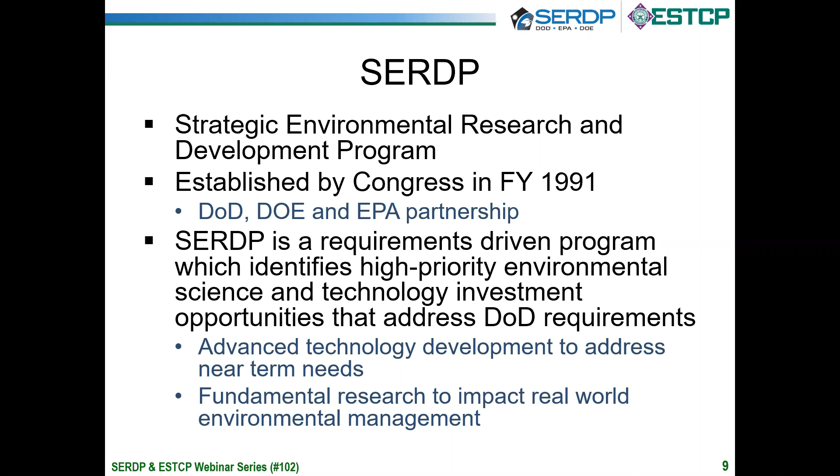ESTCP is the Environmental Security Technology Certification Program. In this program, we demonstrate innovative environmental and energy technologies. These investments capitalize on past investments performed under SERDP or other research programs and are designed to transition technologies out of the laboratory and into the field. Especially important in all ESTCP demonstrations is the ultimate transition to implementation and regulatory acceptance.

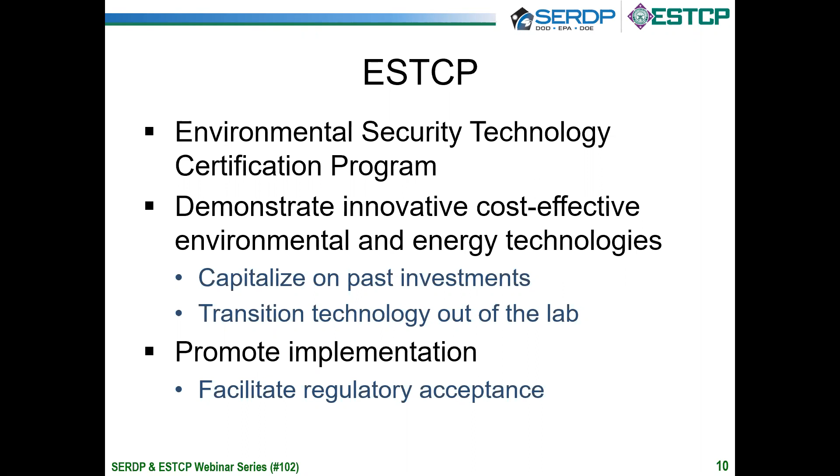SERDP and ESTCP are complementary programs, with much of SERDP's R&D occurring at the lab and pilot scale with occasional field efforts, while ESTCP demonstrations are primarily at the pilot and field scale, although occasionally supporting laboratory efforts are conducted. There are 4 program areas in SERDP and 5 in ESTCP. Installation Energy and Water program is ESTCP only, while the other 4, Environmental Restoration, Munitions Response, Resource Conservation and Resiliency, and Weapon Systems and Platforms, are both SERDP and ESTCP programs managed jointly by a designated program manager.

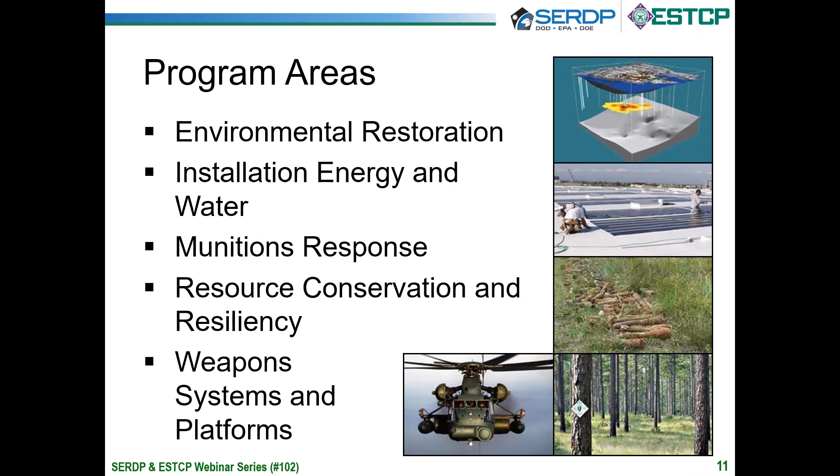Today's webinar presents research and demonstration efforts that were conducted under the Weapon Systems and Platforms program area. This program area has essentially 5 focused areas, which include surface engineering and structural materials, energetic materials and munitions, noise and emissions, waste reduction and treatment in DoD operations, and lead-free electronics.

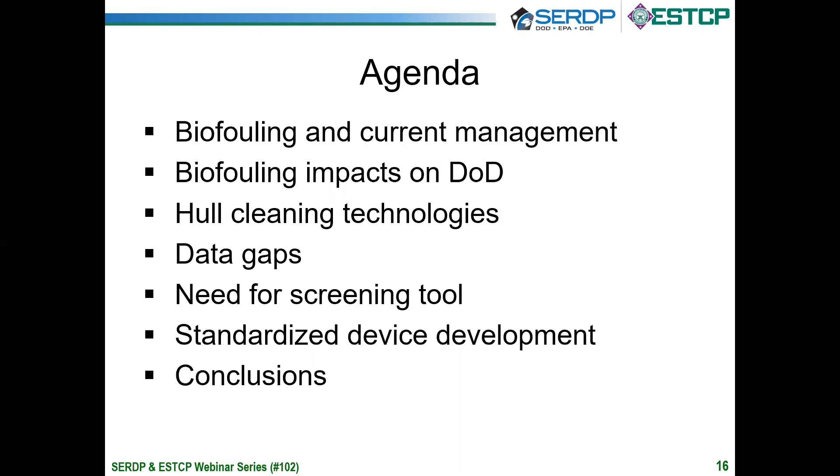I'll finish with some conclusions and look forward to taking some questions. What is biofouling, how do we manage it, and why do we care about it?

Biofouling is the attachment and growth of organisms on immersed and man-made objects. The Department of Defense uses biocide-containing anti-fouling paint systems to control biofouling on the underwater hulls of their vessels. The primary coating system in use is called a copper ablative underwater hull coating system, or anti-fouling paint. These paints are designed to release the biocide cuprous oxide at an effective rate or dose over time, and to prevent the settlement and growth of these marine biofouling organisms.

The coatings are fairly effective, although they're somewhat of an older technology, but eventually, especially on DoD vessels that don't have a very high activity profile, they are overcome by biofouling and some growth will occur. It only takes a little bit of growth of biology to create a roughness that has a negative and measurable impact on ship performance, especially hydrodynamic drag, which impacts speed, fuel efficiency, and these sorts of things. So we mitigate this fouling through the use of in-water cleaning.

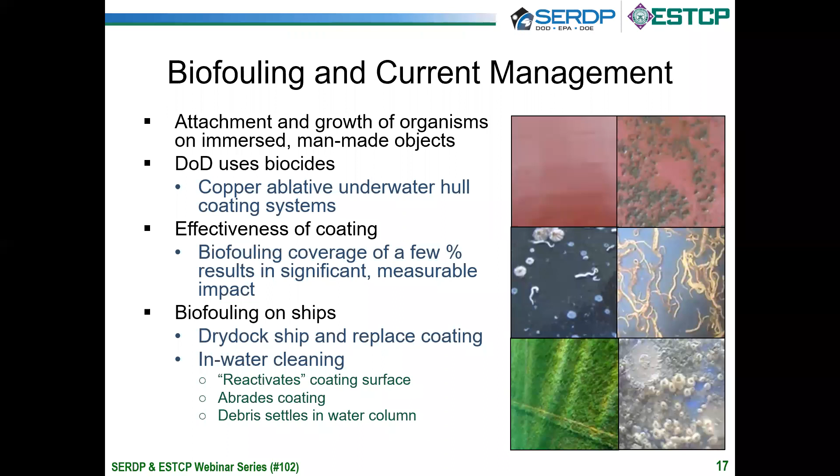Biofouling not only has this negative effect on fuel efficiency, but it also can negatively impact speed, range, and maneuverability of vessels. When we're in the process of mitigating biofouling that accumulates during these maintenance events, the ship is essentially taken offline and can't be used for its intended purpose. Although those cleanings don't take a long time, they do require the ship to be pierside.

Biofouling also has negative effects on signatures, and if we're using energy and fuel to overcome the roughness and drag associated with biofouling, we're not able to use that same energy for our military intent. There are air and water quality concerns that center on biofouling control that I'll highlight as we go through.

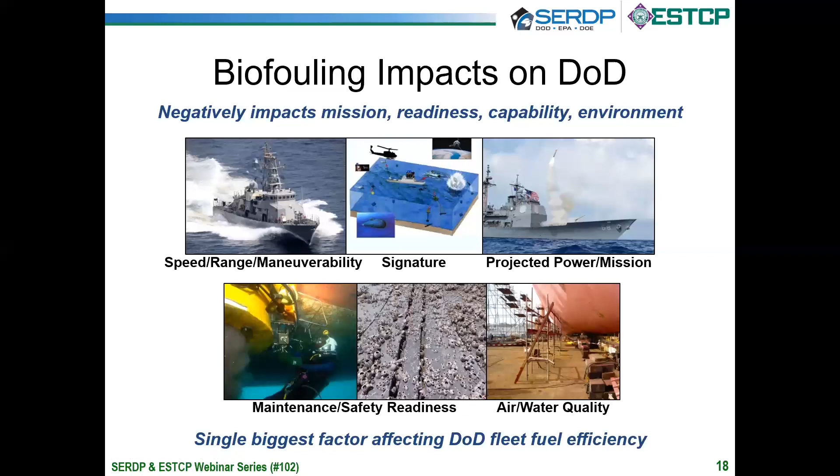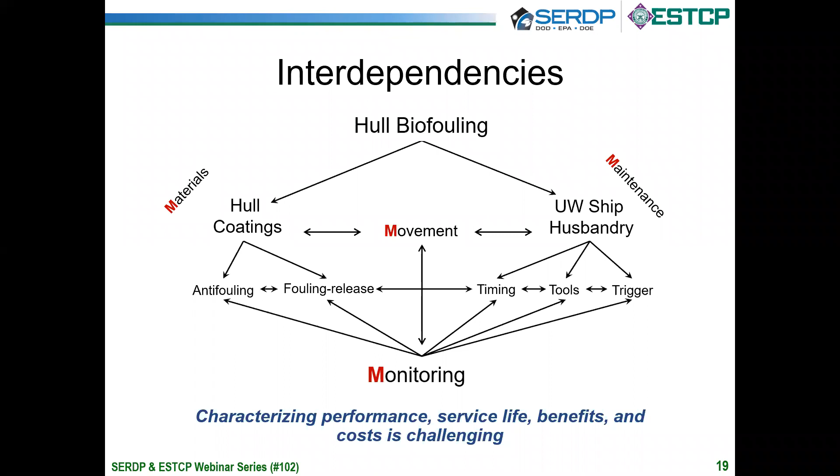There are copper ablative anti-fouling paint technologies that contain the biocide cuprous oxide, but there are also new coatings on the market that contain other biocides, sometimes combined with cuprous oxide, but sometimes without heavy metal biocides. These organic pesticides are of high interest because of the reduction in heavy metal used, but also because they have a shorter environmental half-life, which could be beneficial.

There are also some biocide-free coatings on the marketplace. The primary technology is called fouling release. This is a low surface energy coating that minimizes the ability of biofouling organisms to adhere and stay well adhered to the surface of the coating.

These have been evaluated for DoD use but aren't in wide use. They're not a particularly good fit with our operational profile, as our ships spend consecutive weeks and months alongside or in a harbor at times, so it's not a good match.

There are some hybrid coatings being introduced to the U.S. market that have some fouling release aspects combined with some biocides. So entering the U.S. market today are a high number of advanced coating systems that are of high interest to the Department of Defense.

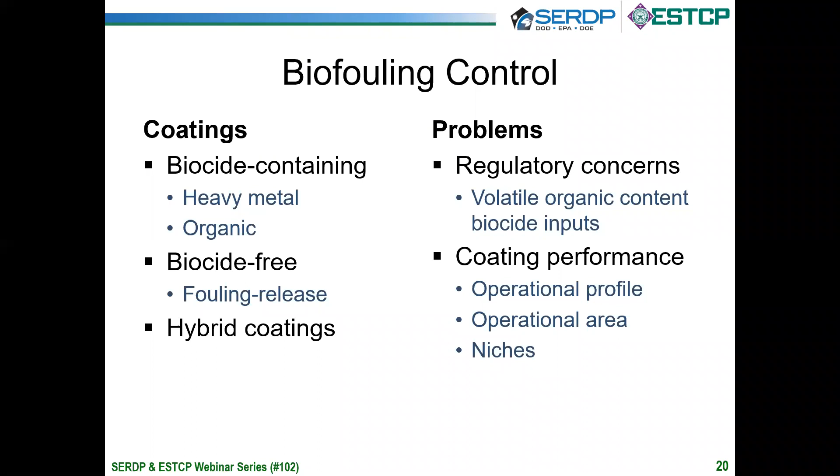Slide 21. So when a hull coating system fails, we execute these cleanings. Now they could be executed in dry dock, but that would be very expensive and time consuming. I would suggest that for DoD vessels, because that's what I'm most familiar with, there would not be enough dry dock space available to execute the cleanings with the frequency that they're needed.

So in-water cleaning is the low-cost solution. It's relatively quick and relatively low cost, and the benefit of it is well documented. The payback period is quite short, especially in the context of fuel efficiency.

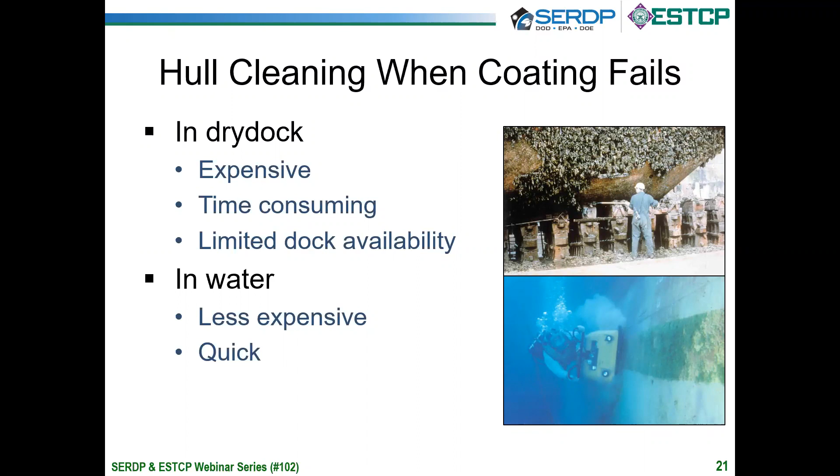Slide 22. The Department of Defense, and in particular the U.S. Navy, have a long history with in-water cleaning. We've been conducting cleanings on different paint technologies since at least the 70s.

We don't want coating failure and biofouling persistence to be the driver that brings ships in for dry docking. So we've underpinned the performance of these coating systems with in-water cleaning, primarily with rotating brush tools, one of which is shown in the lower left picture on this slide. These coatings have enabled our Department of Defense vessels to go longer periods between dry docking, which is a positive and a huge cost saver.

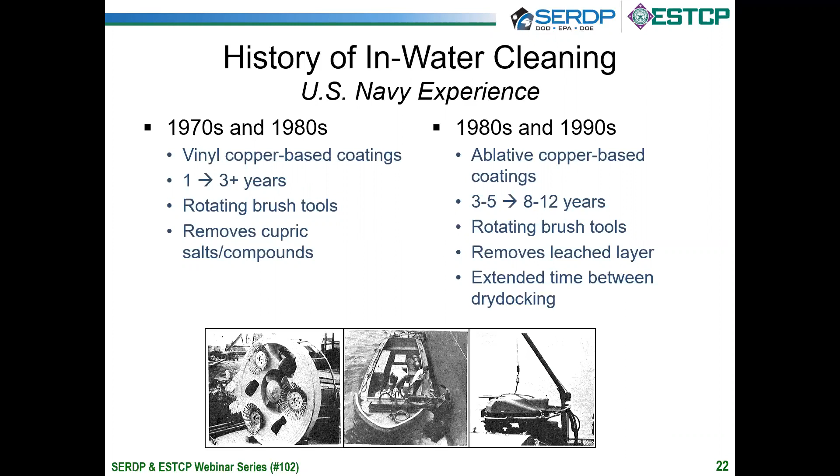Slide 23. The rotating brush tools that we currently use are something that can be applied whenever sufficient biofouling triggers a cleaning. Most U.S. Navy ships, at least, undergo inspections nominally twice a year.

Not at every inspection is there necessarily a cleaning done of the underwater hull paint system. The cleanings are triggered by a combination of a fouling rating, which is an assessment of what type of biofouling is present, and a percent cover of that rating. So the trigger for an anti-fouling hull coating cleaning is a fouling rating of 40, which is small calcareous biofouling, over 20% of the hull. And for a fouling release coating, it's a fouling rating of 50, over 10% of the hull.

As I suggested, we primarily use rotating brush tools for anti-fouling paints, but we've determined that water jet tools are the proper tool to use for fouling release coatings. They're in limited use though, so we don't have particularly mature water jet cleaning technology in our repertoire.

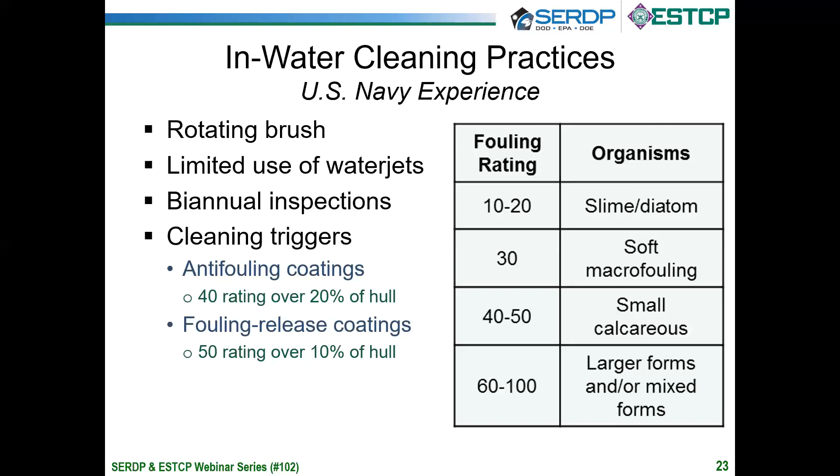Slide 24. The benefits of in-water cleaning I've already described: removing the biofouling as well as restoring coating efficacy. But there are these consequences: the discharge of paint components, the impact on coating integrity, especially paint thickness, and for fouling release coatings and brush tools in particular, a negative impact on surface properties.

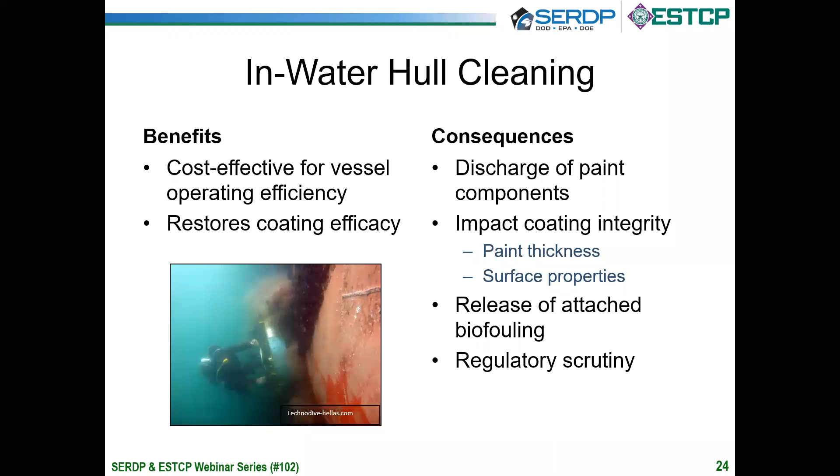Slide 25. So we need to find the right solution. We need better metrics to understand the impact of cleaning tools on hull coatings and their environmental inputs, because environmental regulations represent a constraint that affects this 4M's interdependent variables image that I've already shown.

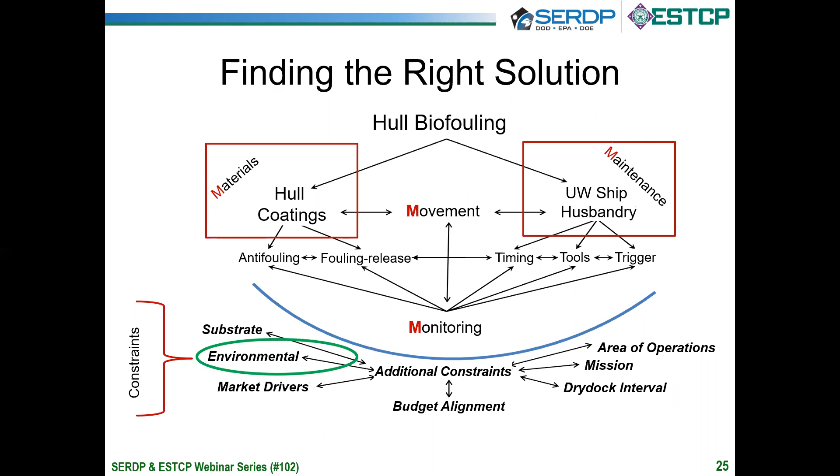Slide 26. So what is it that we don't well understand? Well, our lack of understanding in terms of in-water cleaning is primarily linked to how the cleaning tools affect coatings that we haven't been using for a long time.

These coatings that I mentioned are emerging into the U.S. market and are of high interest to the DoD. So we need to understand the impact on coating thickness change, any kind of damage to the coating, and potentially subsequent efficacy of the coating following a cleaning.

But we also don't have a very good understanding of the actual environmental inputs from the coating cleaning, including both chemical and biological components. We also understand that this relationship is going to be affected by the combination of cleaning tool, coating type, and cleaning strategy.

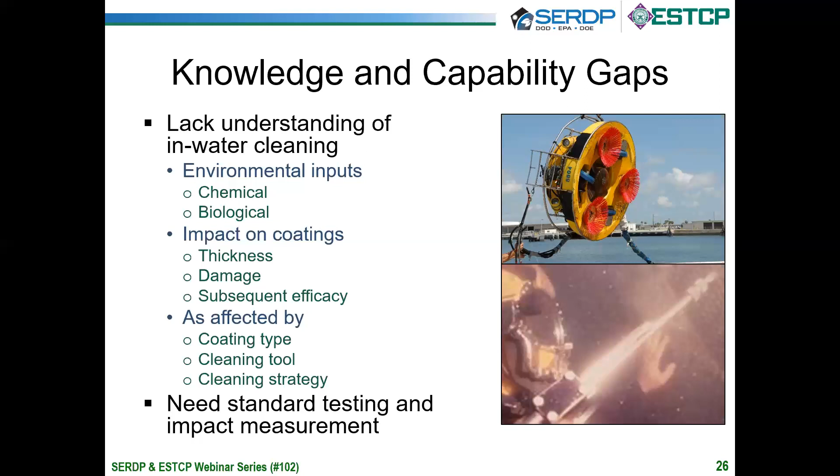So we've identified a need for a standard test to quantify this relationship, because we've explored other tools and techniques that don't seem to be a good fit, which I'm going to describe. Slide 27.

One option that we considered for understanding the impact of cleaning on coatings is this Elcometer washability tester, which is commercially available, but primarily used to evaluate the impact of standard cleaning brushes or other materials such as sponges on architectural coatings. So it's not a particularly relevant tool for marine coatings that are used on ships.

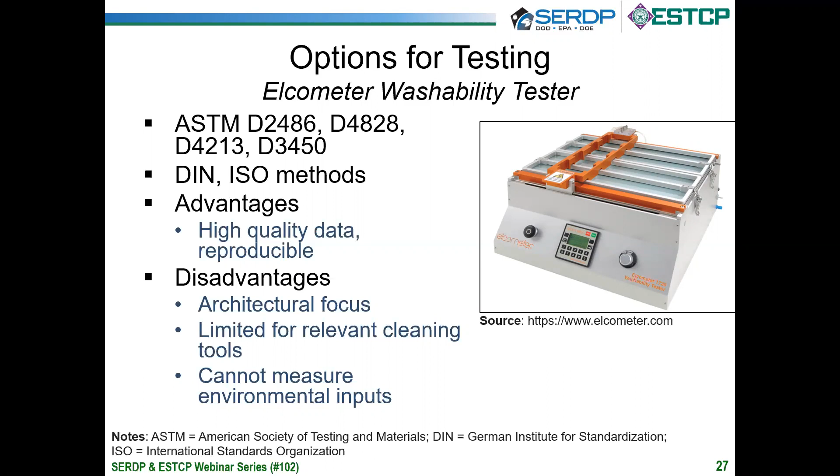The advantage of the tool is that we have high quality, reproducible data, but it's of limited relevance for us, and it would be very difficult to measure the associated environmental inputs that are of high interest to us. Slide 28.

Something we have tried, and have decent experience with, for the legacy copper ablative paints we've been using for a few decades now, is evaluating the thickness change before and after cleaning directly on a ship hull. The advantage here is that we're applying the full-scale tool to in-service coating, but the disadvantage is that it's very difficult to resolve small changes in paint thickness, and we have a very limited ability to assess the environmental input from the coating in terms of particulate and biocides.

For the new coatings that are of high interest to us and that we're actively evaluating, it would be high risk to apply this technique to coatings where we don't have any familiarity with how they might respond to cleaning tools, because if the impact is quite high, then we basically have a bare spot on our hull, which would not be desirable. Slide 29.

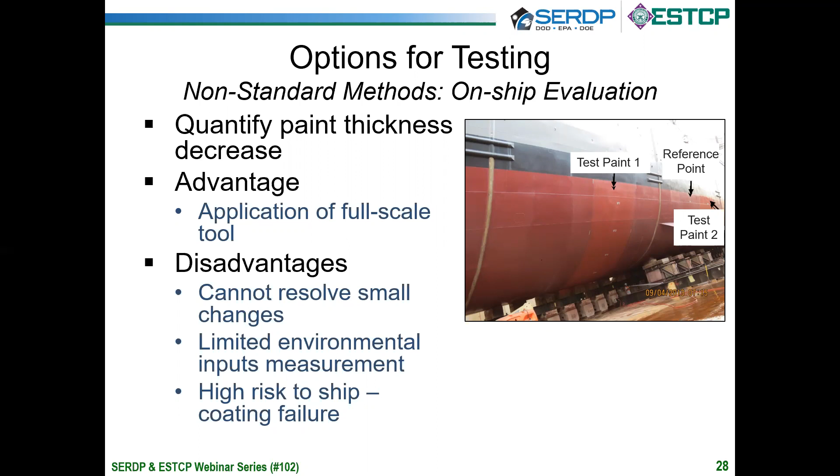Another option for testing that we've used and tried is what we refer to as a raceway test. In the upper right, you can see there's essentially a panel about the size of the wall of your average meeting room.

In that raceway, there's a removable panel to which we can attach test paints on test panels. We can run the full-scale tool across those test panels, and remove them for up-close analysis. The advantages are that we can apply the full-scale tool, and the data are very high quality because we can control exactly how the paints are applied to the panels, and there's no risk to the ship.

The disadvantage is that it's quite high cost. A lot of infrastructure is needed, and there are only a limited number of places where you can do this kind of testing. There's also a limited ability to measure any kind of environmental inputs.

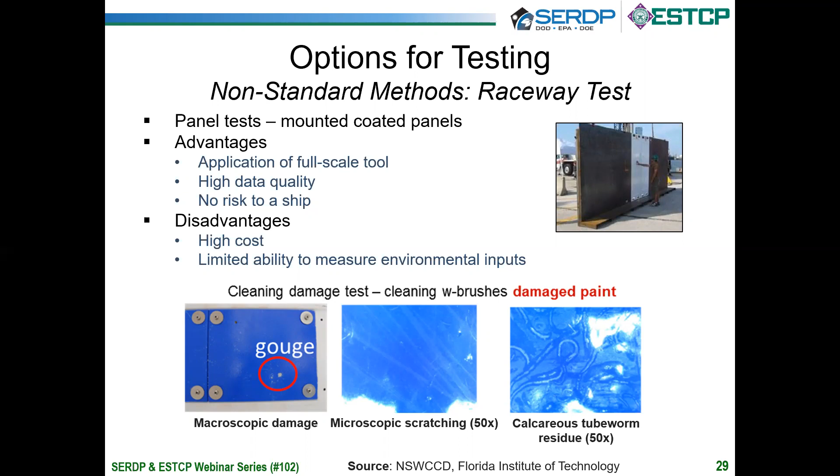Slide 30. This just provides a few more photos of the raceway test, and you can see on image number 3, 10-inch by 12-inch panels that have been bolted to the removable frame.

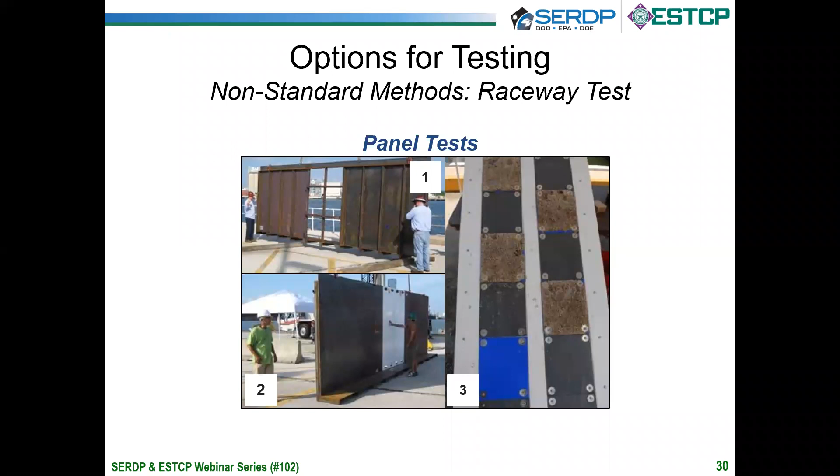Slide 31. So this brings us to where we are today— oh, I'm sorry, take that back. I forgot there's one other option for testing that we have evaluated, and that is a diver handheld tool. We'll go to slide 32, and then we'll come back to 31.

This is a schematic of the handheld tool. The height of the sample chamber, just for scale, is about 6 or 8 inches. So this is essentially creating a trapped volume of water. It's a tool that can be applied by the diver directly to the hull of a ship.

We have a cleaning material at the base of the sample chamber, and then we have this crankshaft which allows us to rotate that cleaning head. You have a trapped volume of water with the double-edged gasket, so you can sample the amount of biocide or biology that is removed. Slide 31.

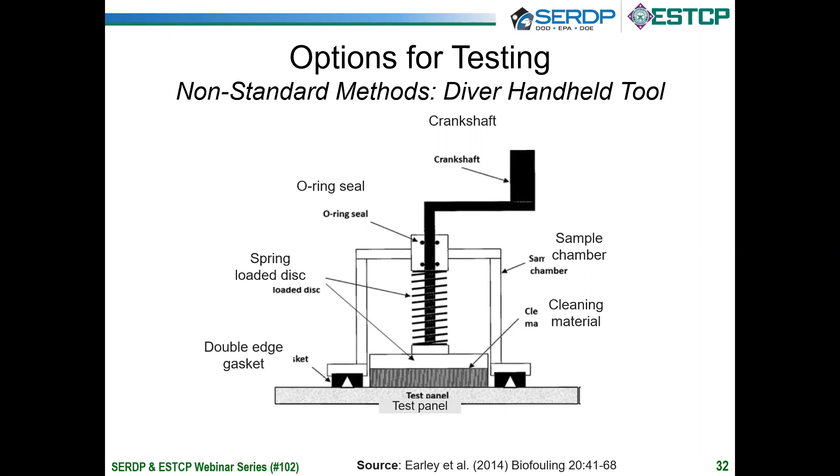The advantage to this type of tool is that you can quantify the biocide inputs, which is important. You could also quantify paint thickness change, but you're not getting the type of forces imparted on the paint that you would from a full-scale rotating brush tool. So you're not using the full-scale tools.

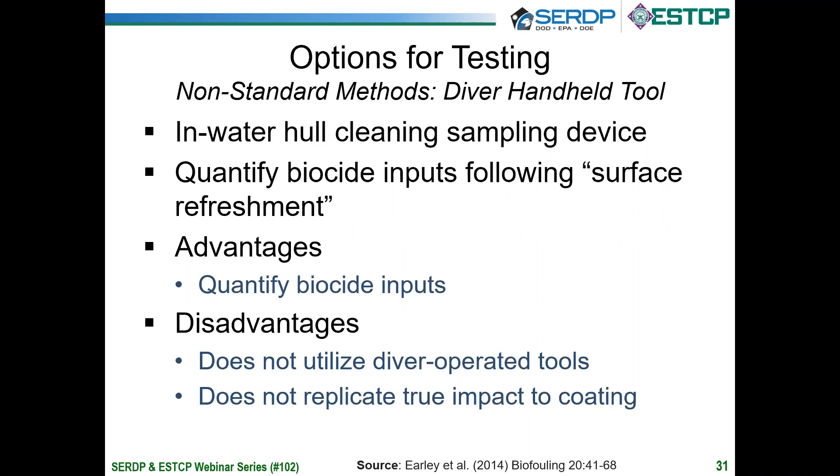Slide 33. So this brings us to the standardized device and method that is desired in order to fill these knowledge and capability gaps. We need to address the weaknesses of these other methods, and we want to be able to match the operational characteristics of the tools that are used in the field while also being able to sample the water quality for the biocides that are released.

So as part of our ESTCP project, we detailed a large number of design requirements, and we designed the tools to match the operational characteristics of the full-scale tools and be able to quantify the biocide released. Slide 34.

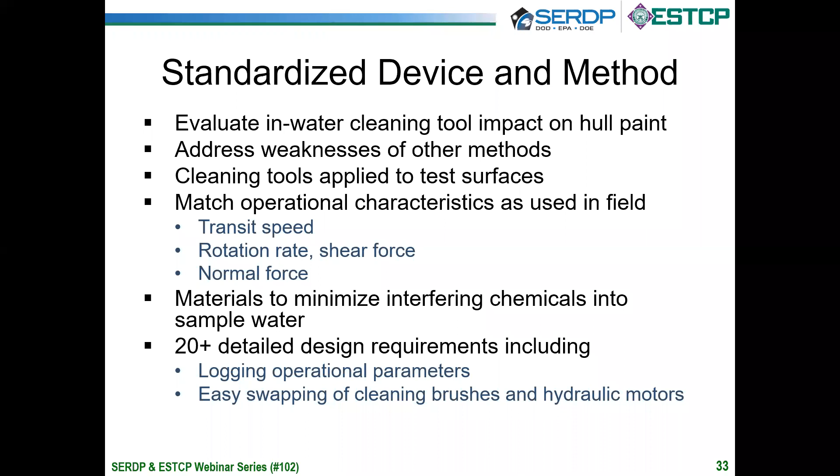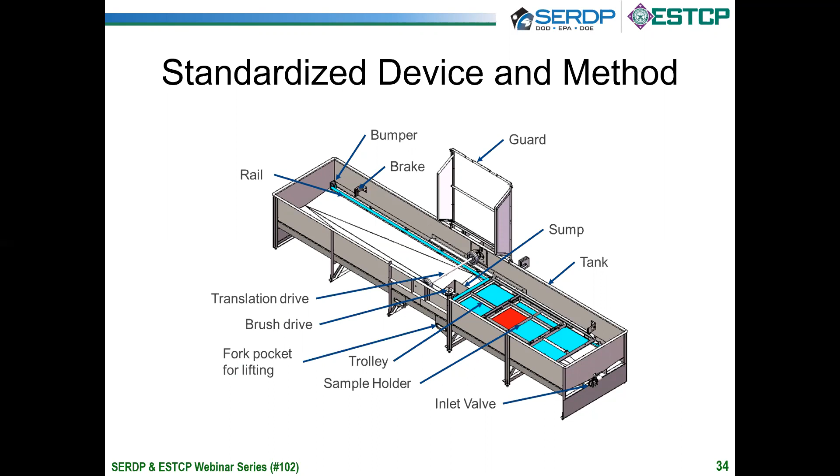Next, slide 35. This is a close-up of the trolley and the sample holder. We made it so that the sample could be easily replaced because we want to evaluate the impact of these cleaning tools on several coatings, and of course, we would like replication.

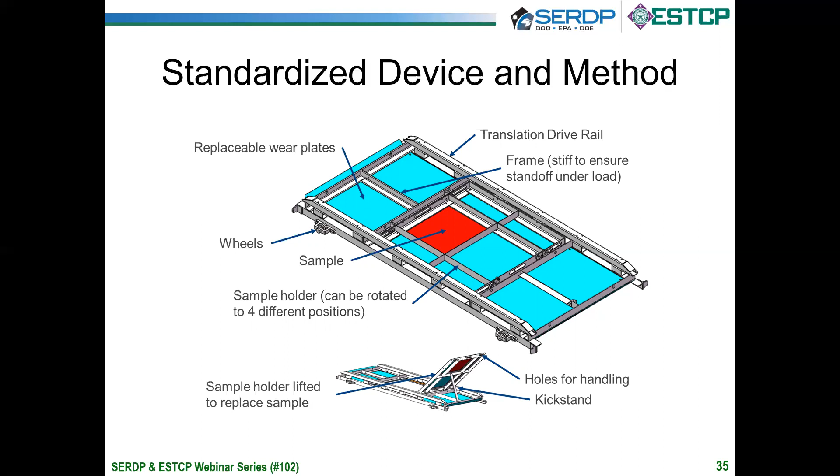We will be quantifying the changes in paint thickness or any other impact to surface properties, and we will be sampling the water quality for dissolved metals, particulate matter, and we're especially focusing on quantifying the amount of copper and zinc released.

Right now, this is a screening test to compare the legacy products to emerging coating technologies, and there won't be any analysis of biological inputs, although that would be possible to do in the future.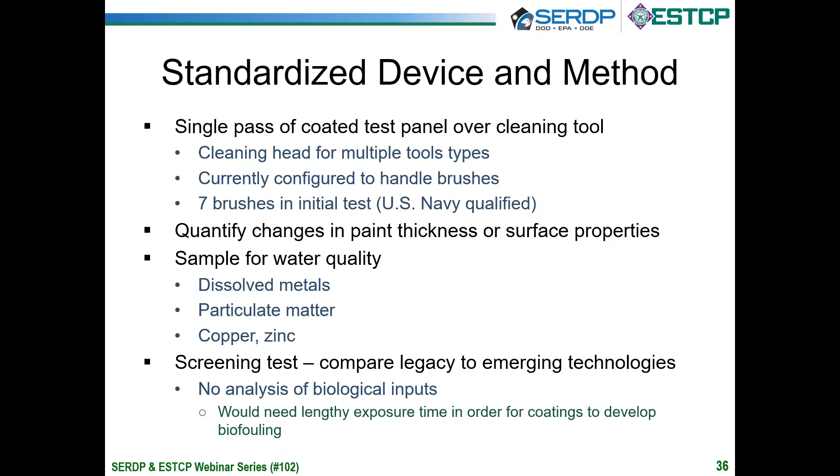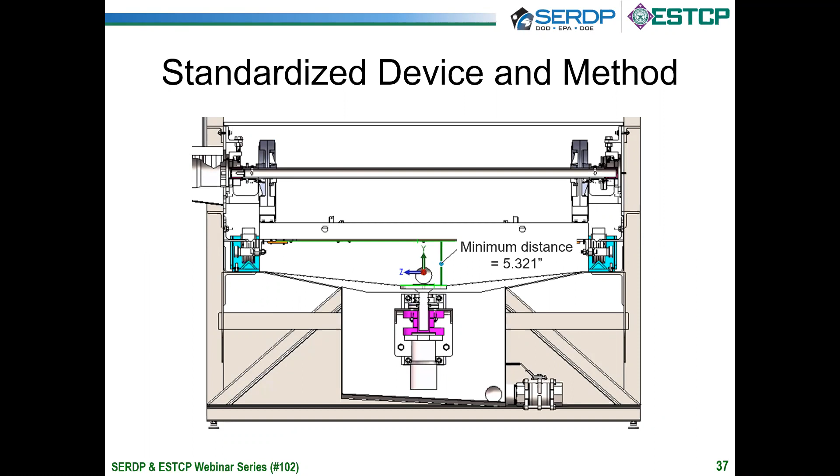Slide 37. This is another view, a cross-section now of the tank, showing the motor that's going to rotate the brush in the sump, and then the trolley is shown overhead. The brush is not in place in this view.

Slide 38. This is now a side cross-sectional view with the motor being represented by the orange rectangle and the brush being represented by the green triangle, essentially. And then you can see that we're basically showing here how the trolley translates the sample over the brush.

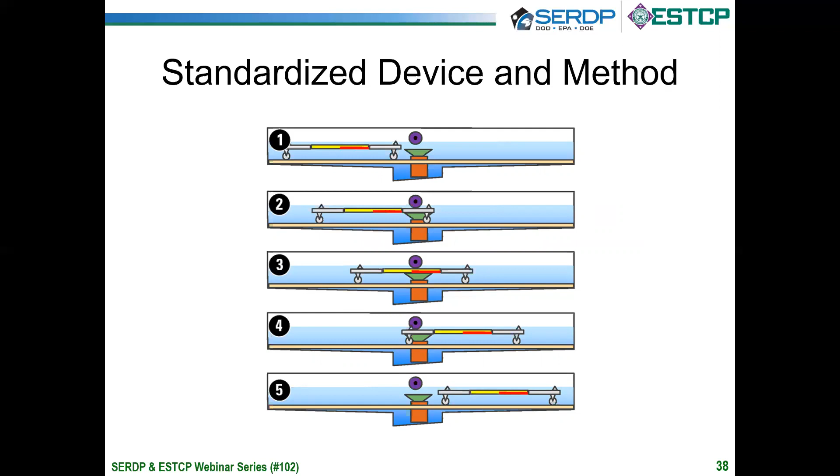Slide 39. So in conclusion, the underwater hull coatings that we use essentially require underpinning by in-water cleaning. This is an effective and efficient combination of technologies until a better paint system can be demonstrated, validated, and transitioned. But there are some important concerns about cleaning, and there's a poor understanding of the impact of cleaning tools on coatings with which we don't have much familiarity. So we need an improved understanding in order to aid regulators and technology developers, as well as end users and stakeholders. So this standardized tool and method is going to help inform the problem.

The tool has potential uses beyond the current scope of the project, such as brush development, alternative cleaning tool evaluations, such as water jets. We could evaluate cleaning efficacy, that is the efficacy of biofouling removal. We could even evaluate biofouling survival or the impact on biological oxygen demand from the removal of large quantities of biofouling.

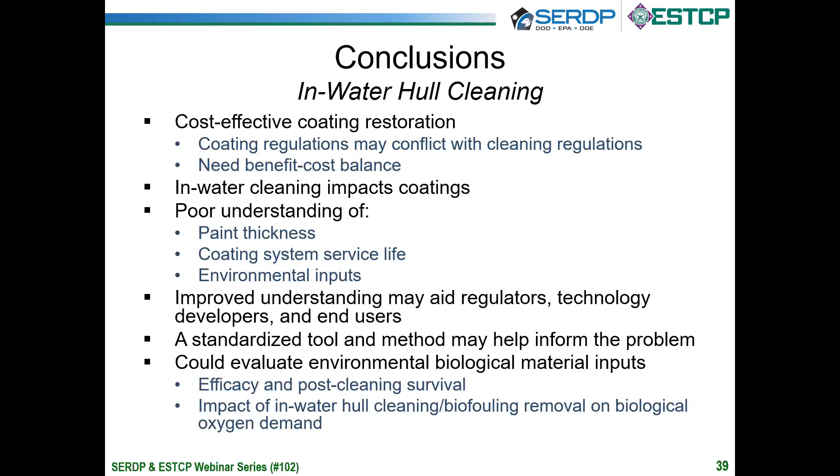Slide 40. The benefit to the Department of Defense is to establish a standardized method and protocol to close the critical knowledge and capability gaps, especially in the context of reducing the risk associated with new coating transition and helping our ability to predict coating system service life, especially tied to the impact on paint thickness change over time. And then the assessment, to enable more comprehensive assessment of the use of in-water cleaning as a biofouling mitigation strategy. And it underpins the key environmental quality concerns that I identified, which are primarily rooted in air and water quality.

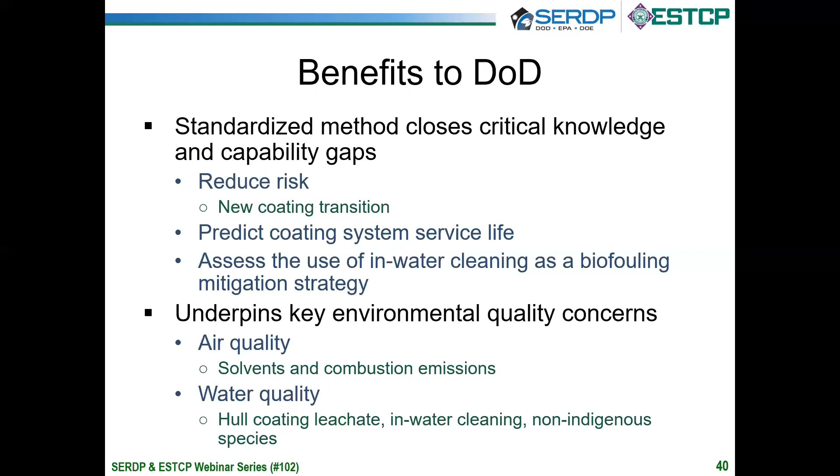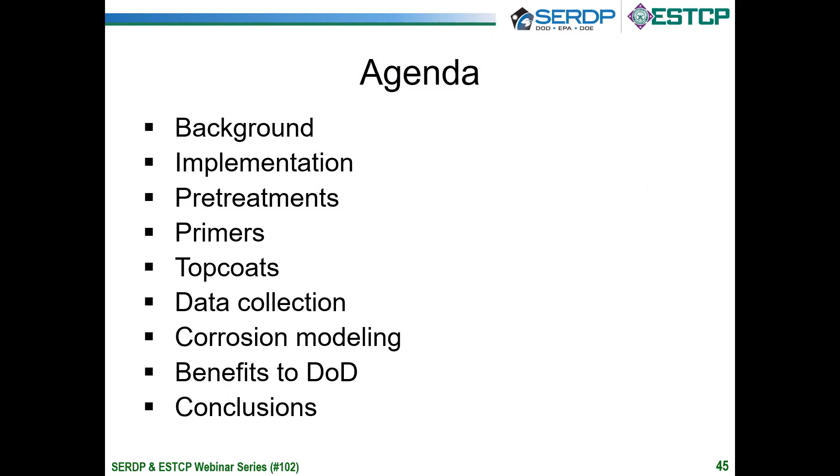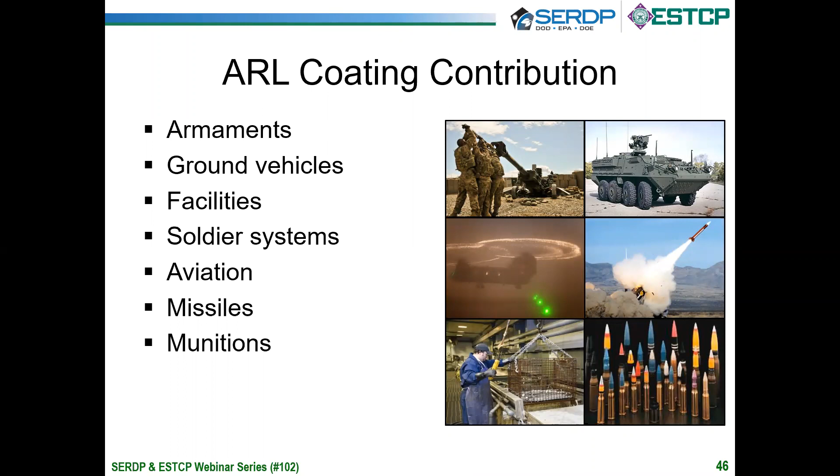Very often we are asked where these coatings are used and how they're applied. We wanted to give you a sense of the various areas. Not only do we apply these coatings on ground vehicles, but also aviation, munitions, and a tremendous amount of support equipment, to give you a gist of where these coatings are applied and used throughout the DoD.

One of the key aspects that enables us to transition technology is not only our authority, but our leadership within this whole arena of CARC, or chemical agent resistant coatings. We have an Army regulation, AR 750-1, that says any piece of tactical equipment going into the battlefield will have our CARC coating or CARC stack up. Along with that, as the commodity manager we are responsible for the various specifications, revising and creating new requirements that enable us to forward the technologies.

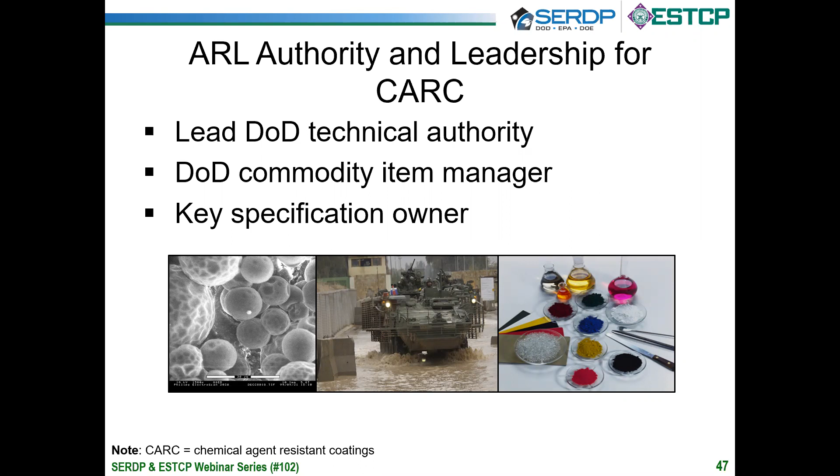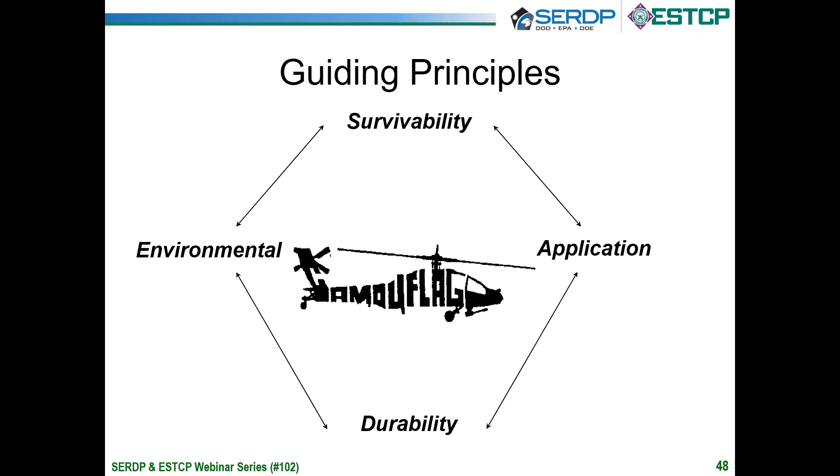It's a very excellent way to use as an implementing or transitioning product.

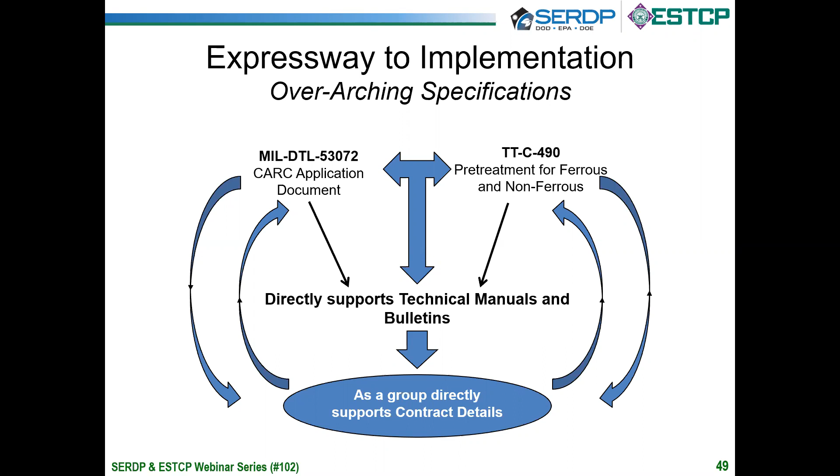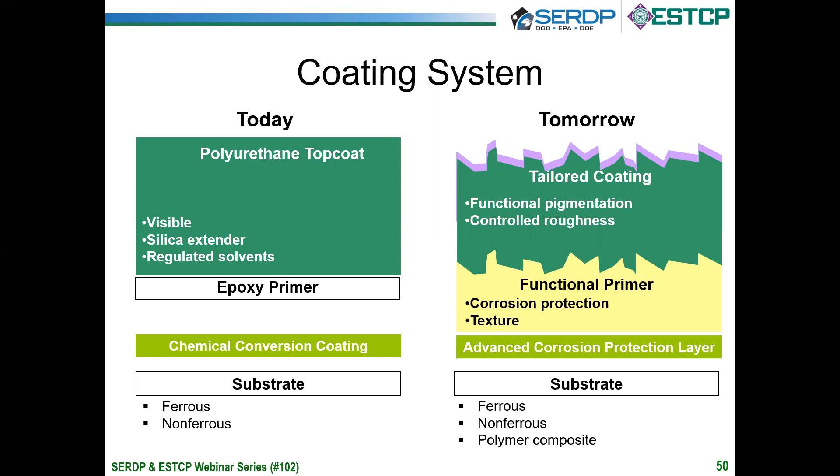Today I'm going to walk you through the pretreatments we use that support or passivate the substrate, then talk about our primer systems, and lastly our top coat. The pictorial here highlights that while we see these as the traditional stack up, the future or next generation of coatings is very multifunctional, and hopefully as we go through this you'll see exactly what we're speaking toward.

With regard to pretreatments, probably and most fundamentally the hardest or most difficult hurdle we've been addressing for some time is the elimination of hexavalent chrome. What was capturing that was spec 15328, often referred to as wash primer, which involved a tremendous amount of solvent and hexavalent chromium.

As we explored alternatives, we found many alternative pretreatments that could be sprayed applied like the wash primer, providing equivalent or better corrosion resistivity. Through all these projects, supported by SERDP or other agencies, once we get through the lab work, or simultaneously with lab work, we'll also be executing demonstrations so we can see what these things are doing in the field.

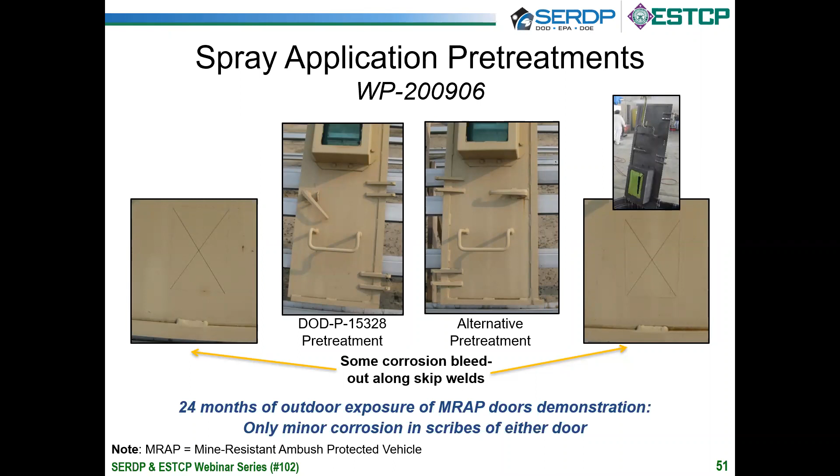Another example: through this wash primer, we were applying it on support type equipment and then exposing them outdoors, such as at Cape Canaveral Air Force Station, again looking for severe environments and information as quickly as we can get it, to discern whether these alternatives would be viable.

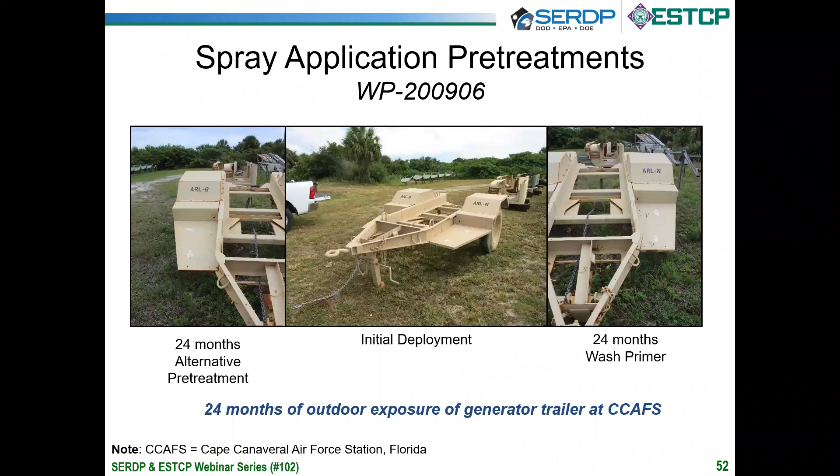Very often, especially for our steel substrates, we're looking at zinc phosphate, and again for the spray application, looking for alternatives to that kind of more conventional pretreatment.

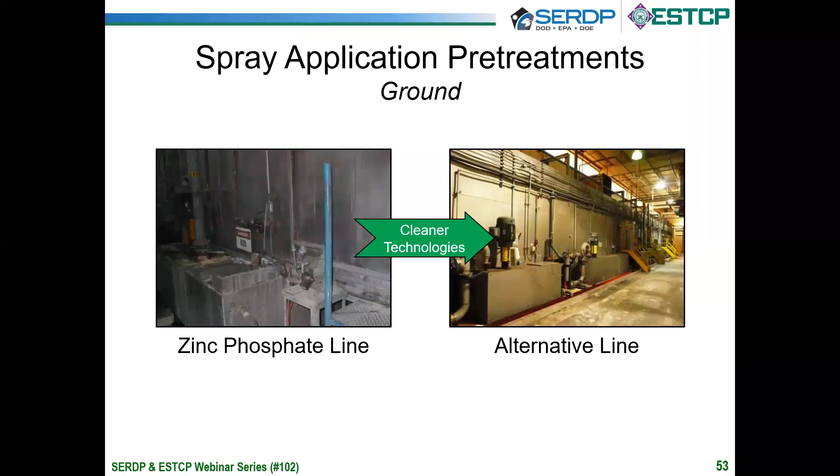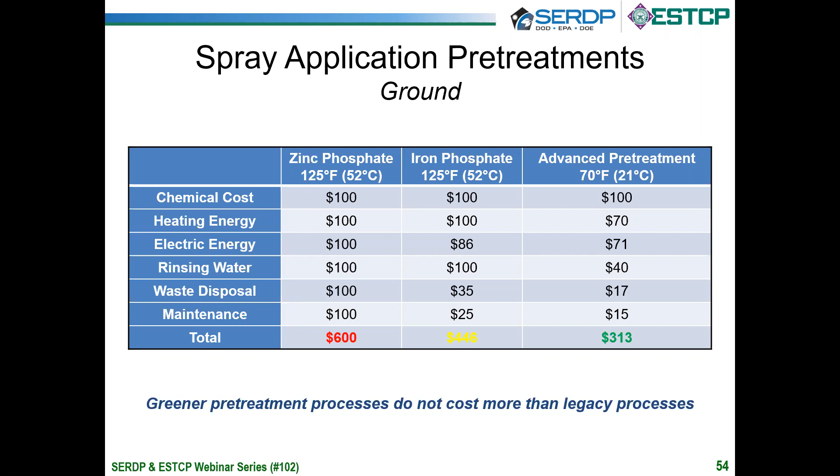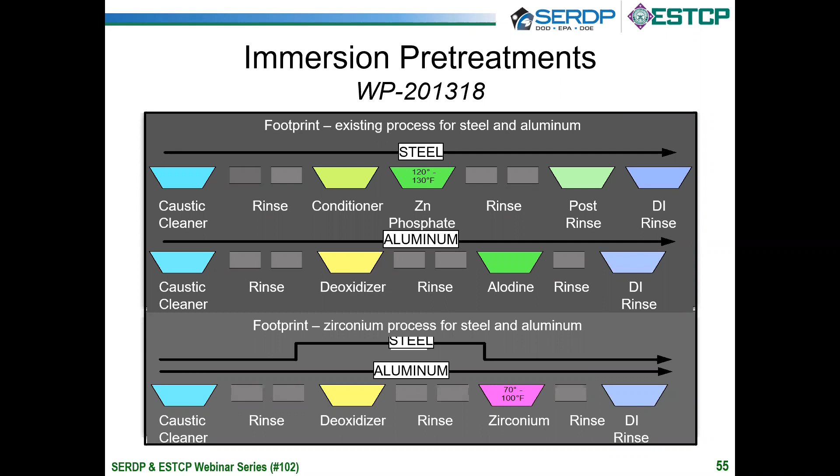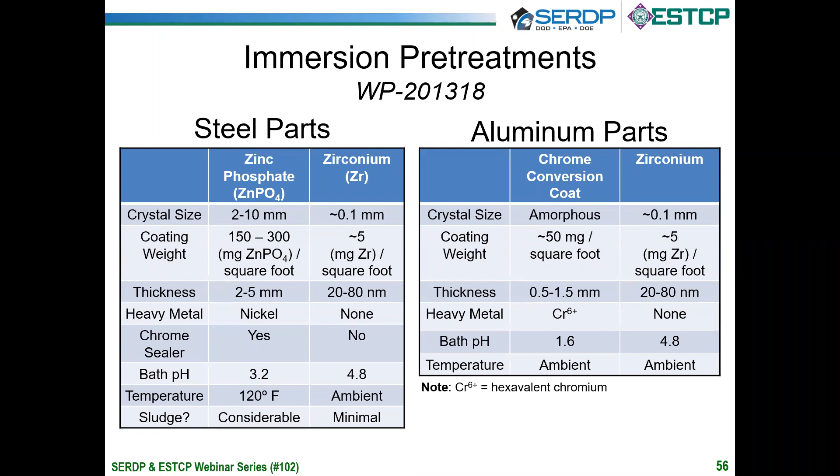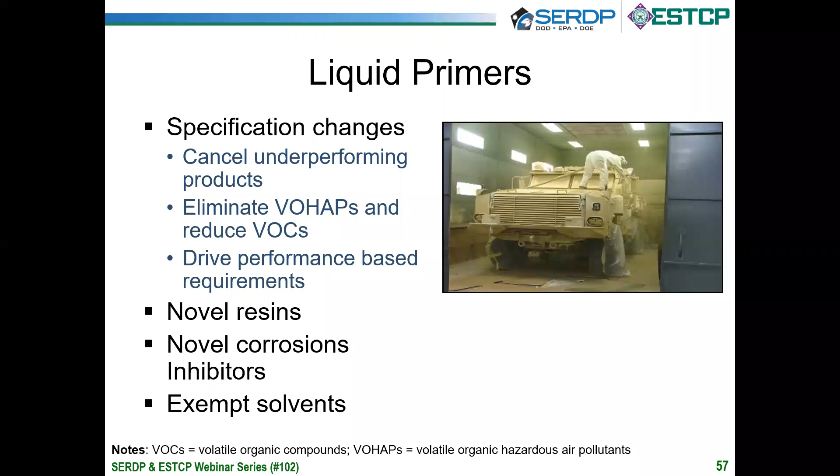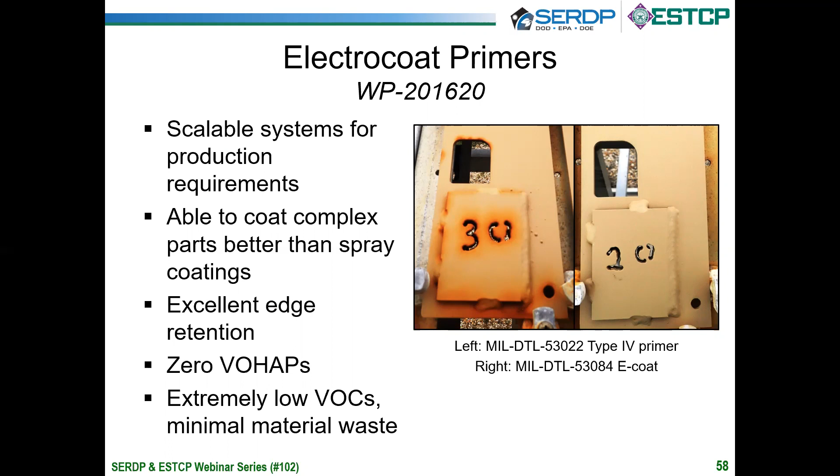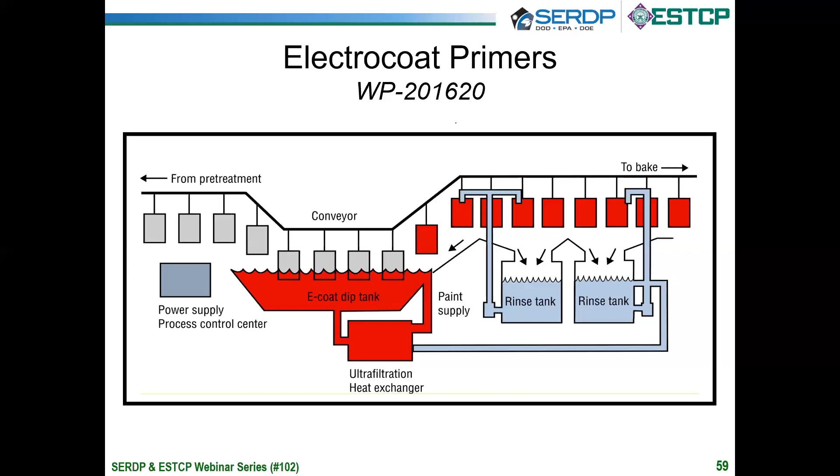Slide 59, please. And to my point, here is just a schematic of the whole process. So we'll be able to take pretreatments that are applied and then use the E-coat as a primer system, and then subsequently bake it, and then have our top coat applied.

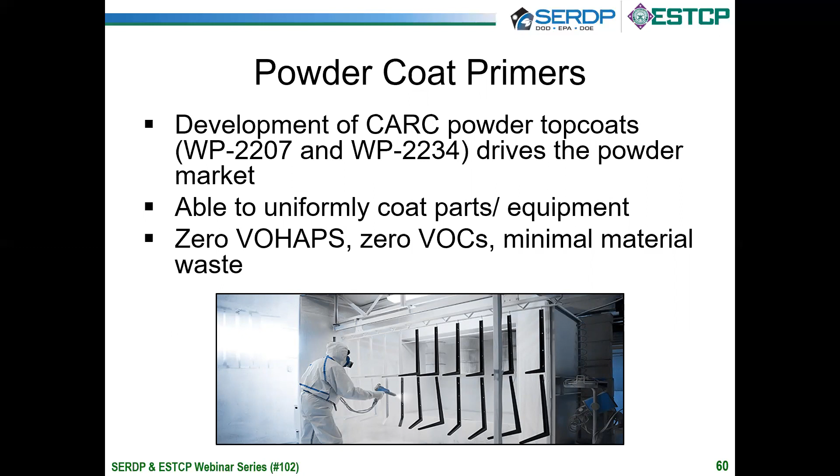While we've been discussing our pre-treatments and primers, what I'd like to shift into now is discussions of our top coats, and recognize that while we did that differentiation, it is and always will be a system. Sometimes I jokingly mention that the top coat goes for the ride, and there is some truth to that, but the reality is the top coat is truly the first line of defense from the exterior elements, and then the pre-treatments and primers are doing their job to passivate the substrate or provide good adhesion.

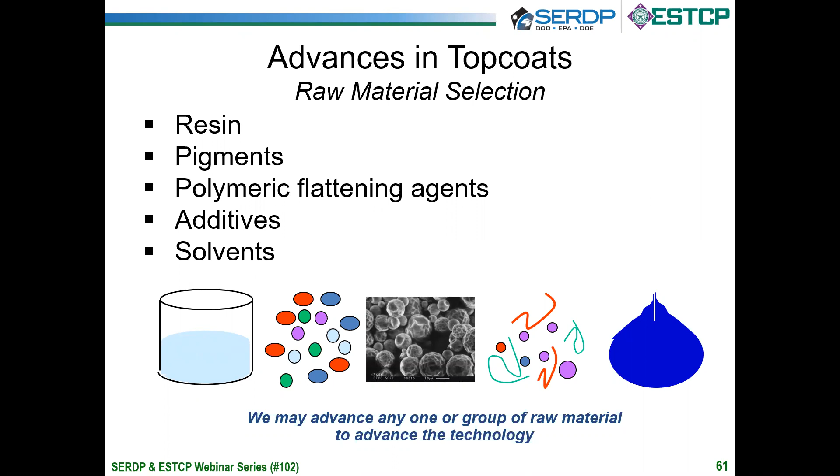So when we begin a project, we often look at particular raw materials within the coating system. And with few exceptions, these are the 5 raw materials typically incorporated in coatings. The exception would be, for instance, powder, which would be solventless. But each one of these is a key aspect to the overall longevity and meeting requirements for top coats. Let's go to the next slide, 62.

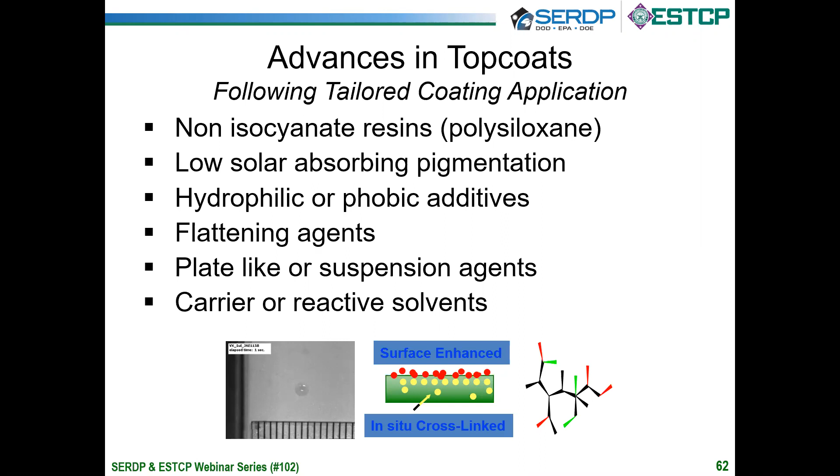I appreciated the opportunity to discuss our stack-up—pre-treatment, primer, top coat—and I think I would not be exaggerating to suggest that probably one of the most challenging situations everyone is facing is the management and handling of data. So whether it's our emails, reports being sent, the data we're collecting within our lab, at our outdoor facilities—it's just growing in leaps and bounds.

There is a tremendous effort here within ARL and with the other services to begin being smarter about that, incorporating artificial intelligence and creating models that will enable us to rapidly collect data, then assemble that data, and have it available so that we can use it to make determinations of best systems and recognize where gaps may or do exist.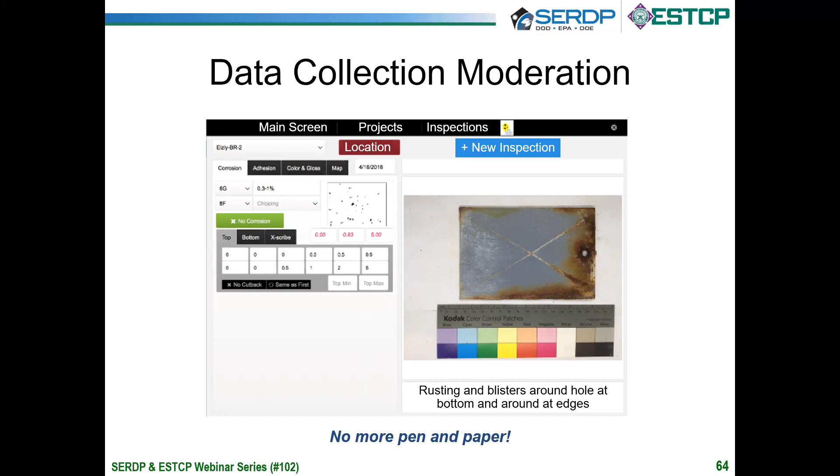Slide 65. In complement to that, SERDP is currently funding programs, and we're participating in that. If you look to the right there, we have 3 areas where we're putting data into. One is just in our fleet data, where we're having folks go into the field and making assessments on actual vehicles. The top sphere is coating data that we have had and are collecting. And the last is just input from us with regard to the various substrates and the various types of coatings.

But ultimately, this is not to do a chemical type modeling of degradation, but a prediction type modeling for our facilities and maintenance areas, so that we can quickly discern that if these pieces of equipment are being deployed in an area that's more corrosive or more harsh, we would already have insight to those types of aspects and discern what may be the best coating stack up. Next slide.

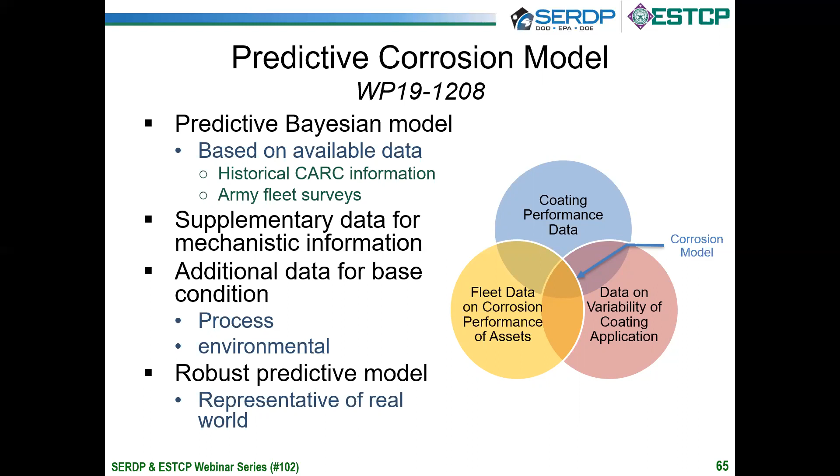So in conclusion, I think there are a number of points to be made that permeate to be the basis for what we'd like to share. With ownership of our specifications, ARL has been able to transition various products and chemistries more effectively. While we're moving to more environmentally compliant coating systems, we're not reducing the performance. We feel these advances in data collection will assist in interpretation of what is happening, and will feed into the development and implementation of new coating systems.

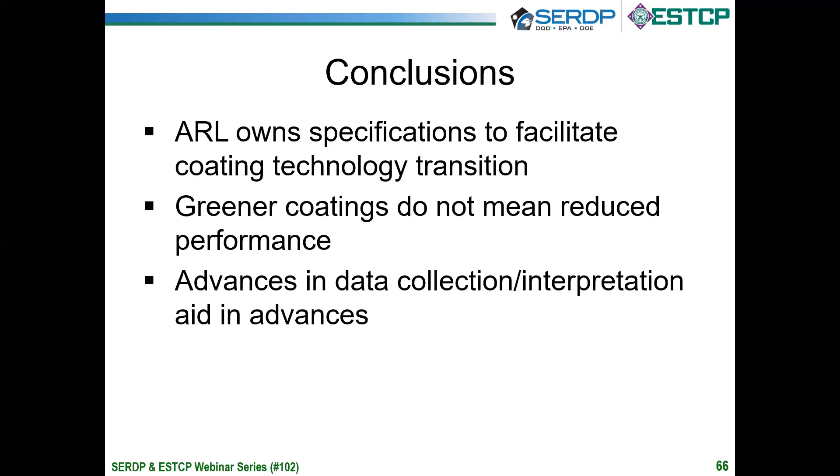Next slide, please. I'd be remiss to suggest that the work we do just remains onto itself. We're very guided by a number of drivers, and we're proud to express that as we advance these coating systems as stewards to the environment, to end users, and most importantly, support to our service members, men and women in our service. When we capture environmental compliance and enhance these coatings without negative impact, that is a tremendous win-win for everyone.

Finally, I'd like to express our tremendous appreciation for industry, academia, and our other services that continuously collaborate with us. As a group, we cultivate some of the best work with regard to supporting our warfighters. And so with that, I thank you, and would be happy to take any questions.

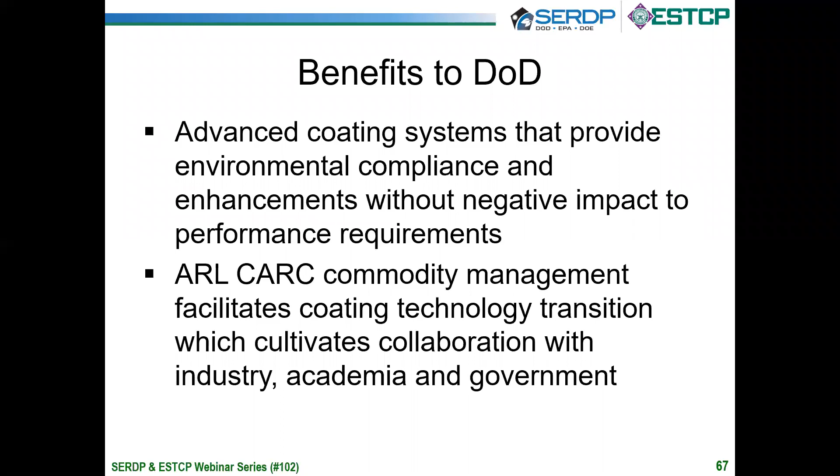Are costs from durability and longevity calculated into your examples of cost effectiveness for greener products? Typically, yes, and it's rather a loaded question in that it takes time for us to put these coatings outdoors and then do that comparison, where if something lasts, say, 3 years and a newer product would last 3.25 years, there would be a delta. Many of our programs have return on investment templates that we can use, and at the very beginning we input those values, and as we get more data, we input that kind of information.

Thank you, John. Here's a question from Boeing. Can the same cleaner and deoxidizer be used on both steel and aluminum before the application of the zirconium coating, and what cleaner and deoxidizer are you using? Typically, yes, and I probably would like to address those offline as far as some of the specifics, because I think we'll quickly get into the chemistries of things.